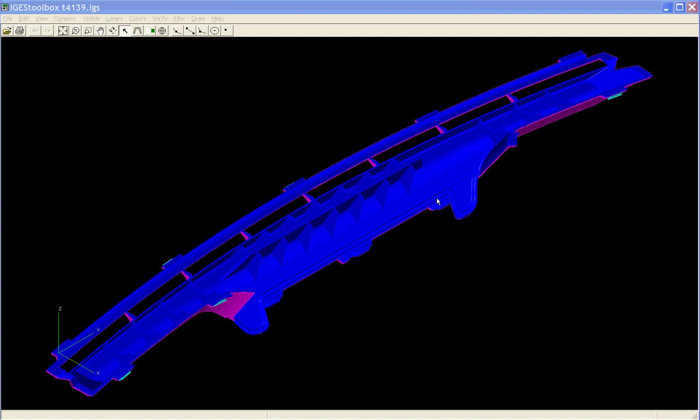Hello again. In this video, I'm going to demonstrate IGES Toolbox's ability to transform data from one position to another. In the mold and die business, it's sometimes called car position to die draw. I'll also throw in a few other things along the way.

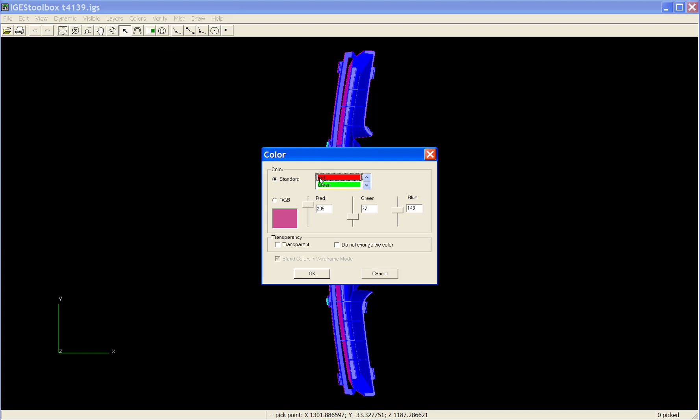So right off the bat, I'm going to use the level and color commands to set an active level and active color. Now moving over to the draw menu, I'm going to select the draw lines command. This little beauty puts a grid of body lines around the part in the working units of the geometry. In this case, we're working in millimeters. These lines are created on the level with the color that I selected earlier to be active.

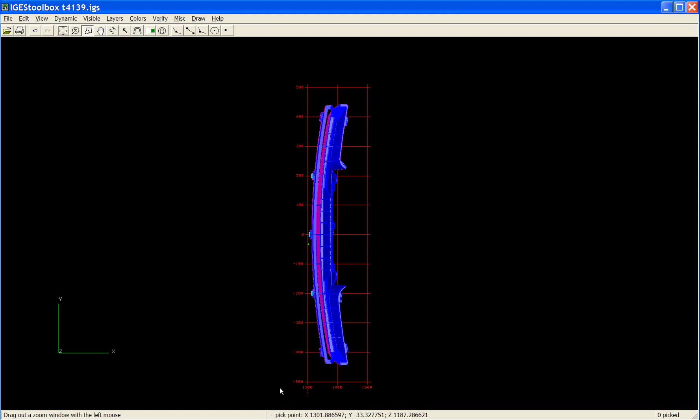So by interrogating this part a little more, I can see that I'll actually need to tip it around the y-axis to get it into die draw. I'm now going to cut a section through the geometry using 2 points on a grid line. This will allow me to measure the angle of the rib using 2 lines to get my degree of tip required.

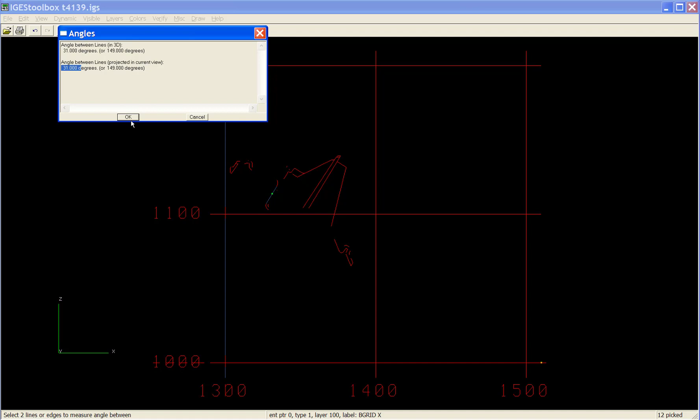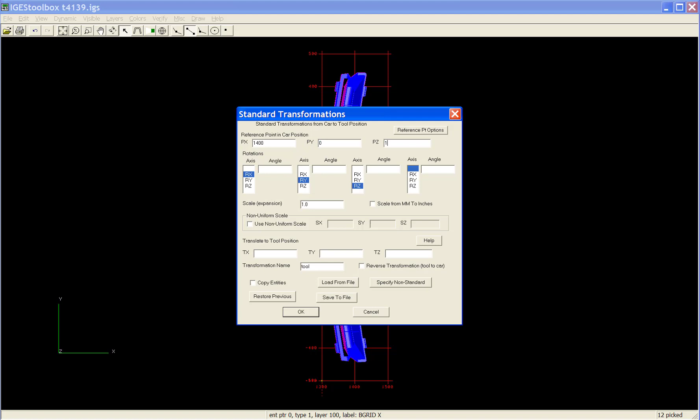Okay, now let's head over to the transform command in the edit menu and get this part into die draw. The first thing I'll do is establish a point of rotation. I got these numbers manually when I added the grid lines earlier. Now I'll enter my rotations about the X, Y, and Z axes.

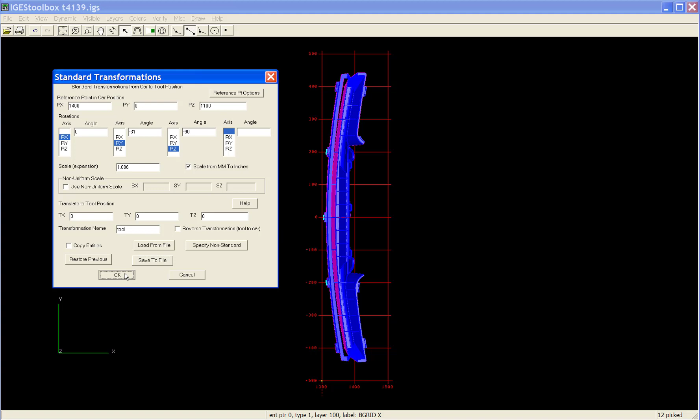This is a plastic part, so I'll add the shrinkage factor. While I'm at it, I'll convert the part from millimeters to inches. And finally, I'm going to move the part to the tool position of X0, Y0, and Z0. A really nice thing about this command is that I can save all of those operations to a file.

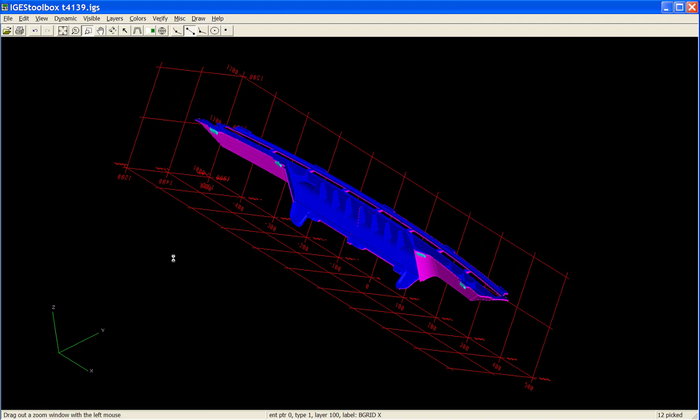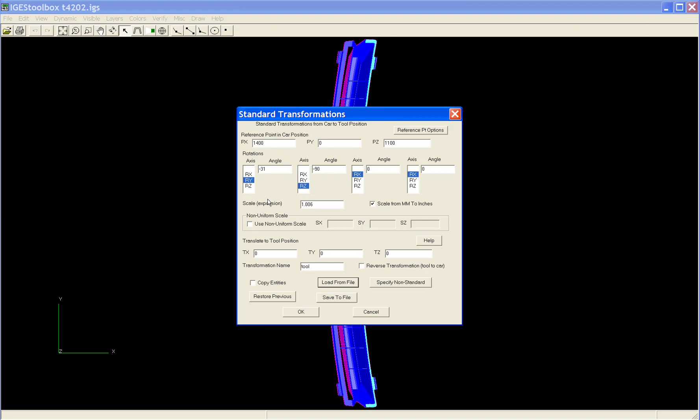Now I'll quickly close this file out and open up a new modified file of the same part. Now all I'm going to do is access that saved tip file, execute it on my new data, and save my new data. And here's my new data in die draw. And we'll quickly save that off as a new IGES file.